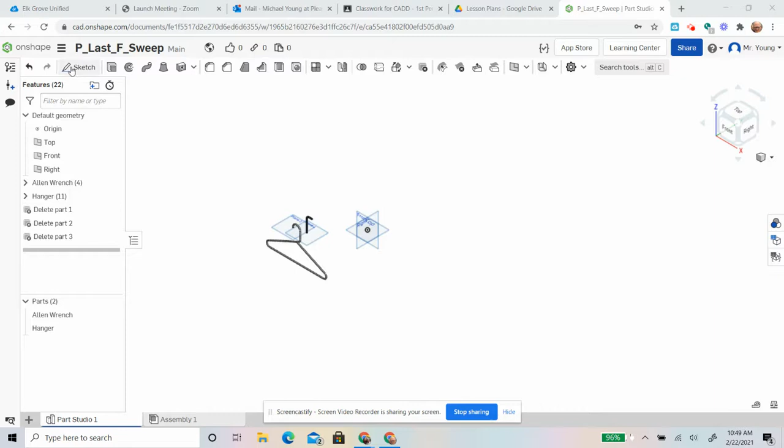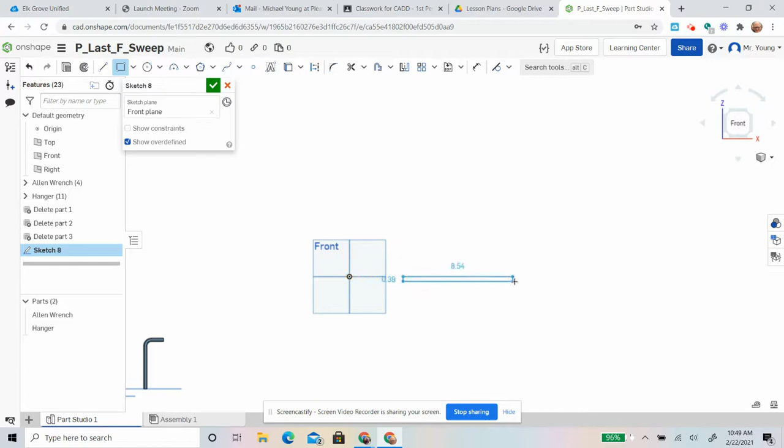We're going to go to the front plane, and we're going to look at it normally. We're going to make some space over here. Okay, so first of all we have to make a cylinder. So I'm going to go revolve it, and we're going to do a 4 inch by a 1/2 inch cylinder rectangle.

Dimension. I line this up with the origin. I think that's going to help us down the road. So often the hardest part of this is having a plane in the proper place when we draw the region that has to attach exactly to the endpoint of my path.

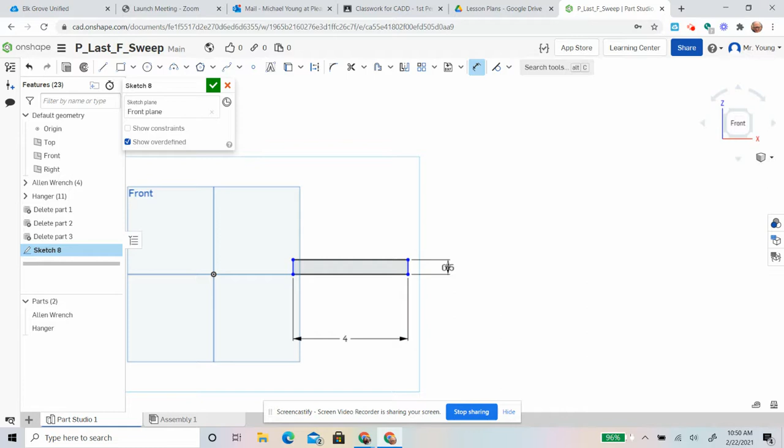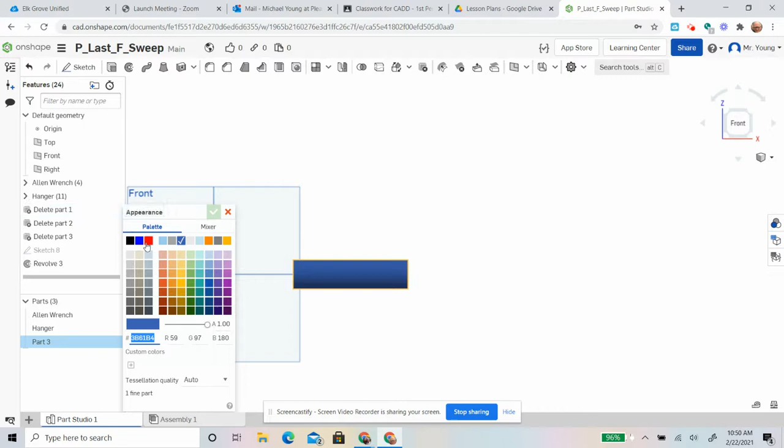Okay, so that's that, and I'm just going to revolve it around this axis. That's part 3. Our job will be easier if we make that a lighter color. Let's make it light blue instead of dark blue.

Okay, so now we're going to do a helix. That's underneath the same menu. That plane actually turns out to be just one option. There's all kinds of different, but we're going to do a helix. A helix is a spiral, and you have to have a cylinder to do it around.

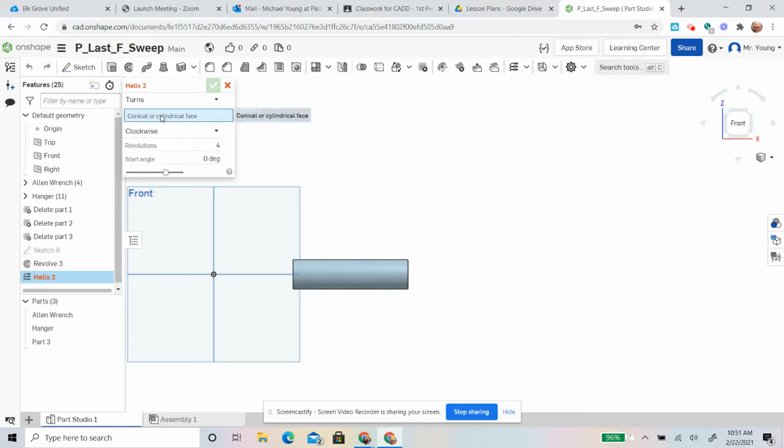So I'm going to click on this cylinder. You can see there's 1, 2, 3, 4 of them in 4 inches. So this is 1 per inch. We want 10 per inch, so we're going to change this to 40. And that's that.

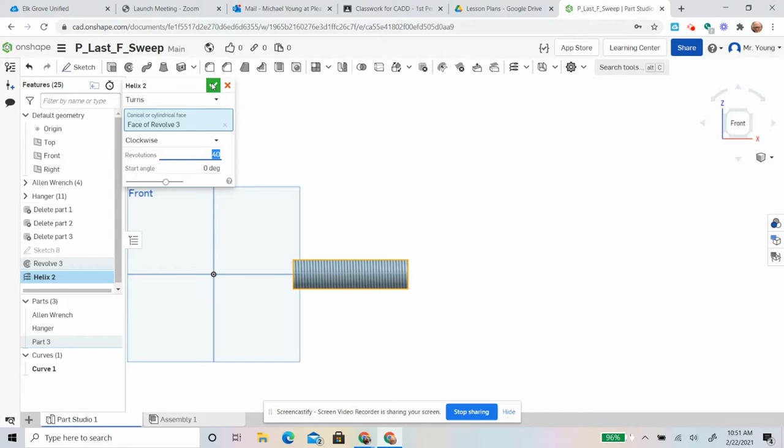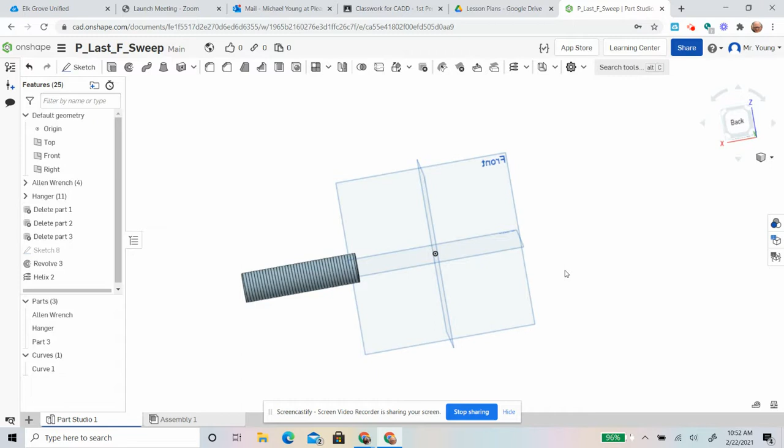Okay, so since I started this thing and lined up that axis to the origin, it puts the front plane in the right position. What we need to do is on the very end of this, there should be a point somewhere. Where is it? Should be right around in here somewhere. Right there.

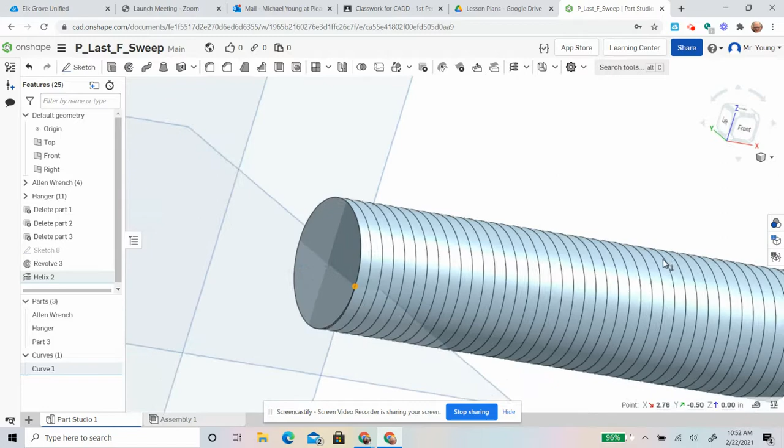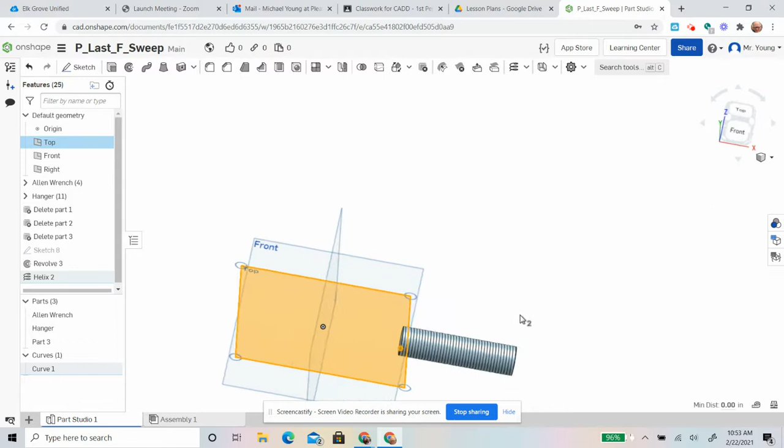Okay, well, it turns out it's not the front plane. It's this plane right here. What's that plane? It's the top plane. Okay, so we want to draw this on the top plane. So, since I have the top plane picked, I'll go ahead and click sketch. Now, if you don't have a plane going through that point, then you have to create one. But that was the serendipitous result of starting by lining it up to the origin.

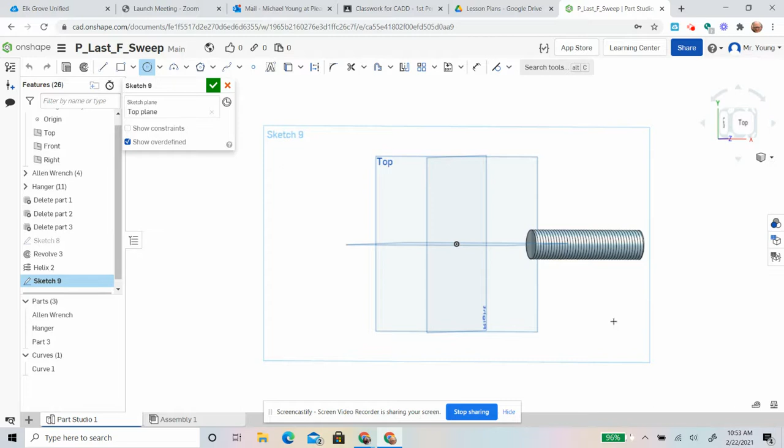Okay, so we need a little circle. Let's zoom in on this, where we should be able to grab that center. There it is, right there.

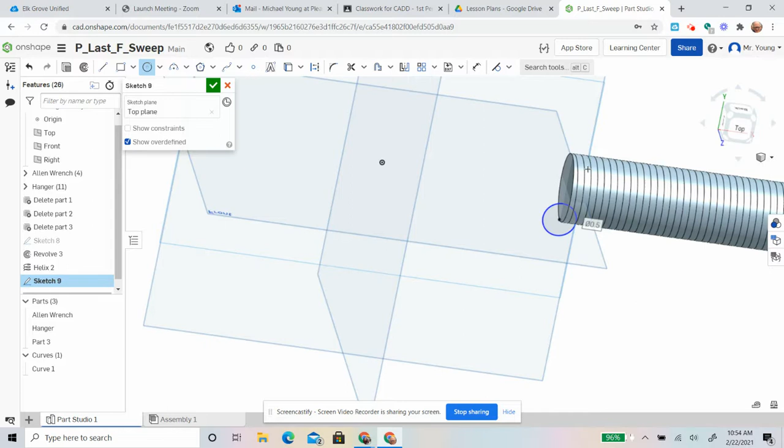Now, there's 10 of these spirals per inch. That means each one is 1/10 of an inch. So if I have a 1/10 of an inch diameter, then every time it swirls around, it's going to touch each other, which can't happen. And plus, we want it a lot smaller than that. So we need to go significantly smaller than 1/10 of an inch. We're going to do 2/100ths of an inch. So that's what we need to make this: 0.02.

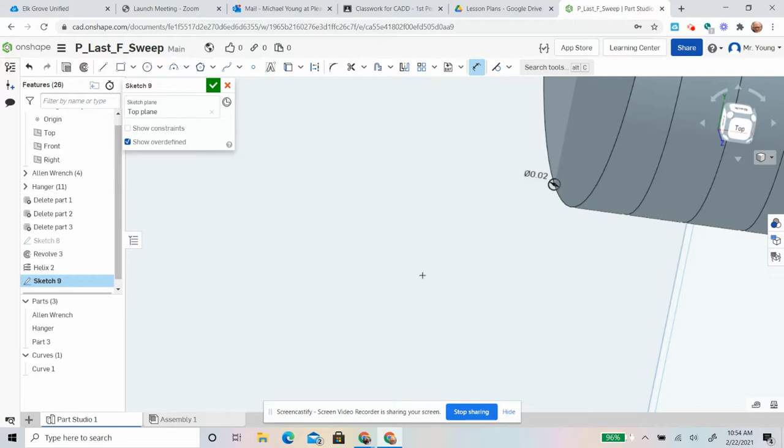Teeny weeny little circle. But on a spring, it's a teeny weeny little diameter. So there it is. So we check mark. We go to sweep. Make sure it's on new. Click this.

Pick my helix. And this is where the problem came in last period, the first period. It switched it from new to add, and so when we hid the cylinder, it hid everything. And we don't want that to happen. This needs to be new, so it's completely separate from the cylinder that I made.

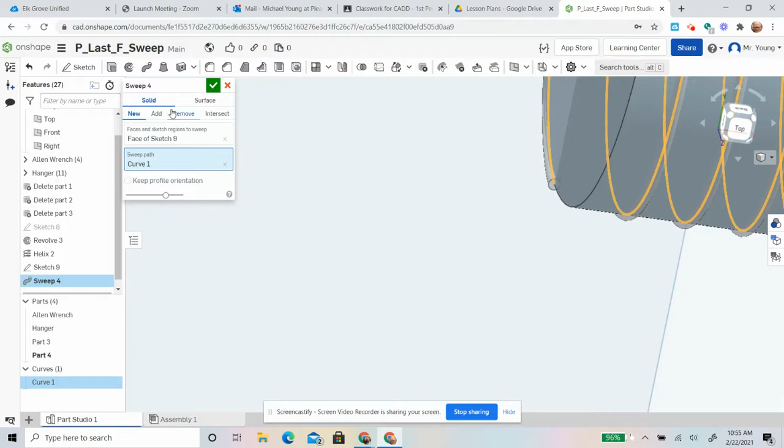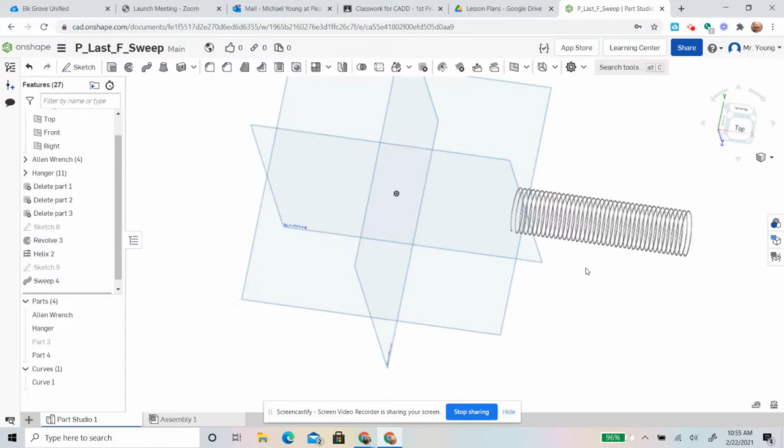Now I can go down here. Part 3 was the cylinder that I made. I can hide it. Now I see my spring. All right, so that is the spring. We'll stop there and start another one for the hex bolt.